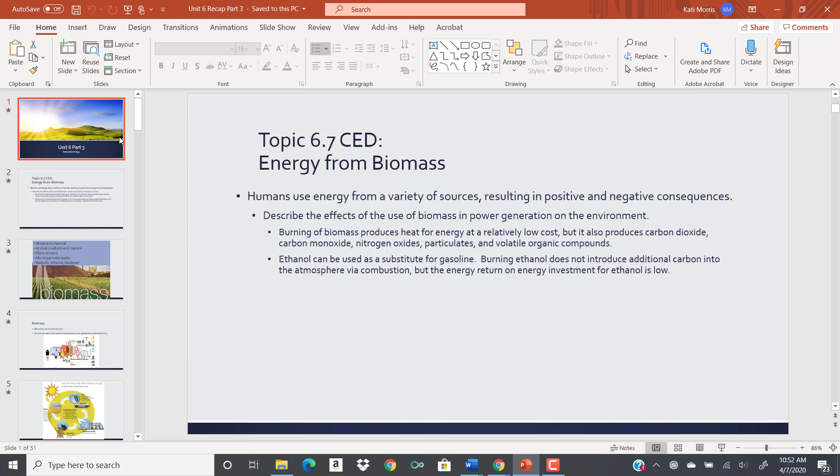Also, keep in mind the same stuff that we talked about with non-renewable energy sources, which is look for the areas of pollution, especially in the processes that come before and after it does whatever it does.

The one thing that you also have to look at with renewable energy that you don't have to look at with non-renewable energy is how much energy can you get out of this and at what times of day is it available. A lot of forms of renewable energy that produce electricity are not going to be available to you 24/7. So the question becomes, what do you do when it's not available?

And the answer is honestly pretty simple, and it's twofold. The first one is you design ways to store that electrical energy, and that would be in battery technology.

Before we had all of our shutdowns, I do know that people like Elon Musk were working on ways to store energy in large batteries. I want to say that he had created one for a home, which if you used it with something like solar paneled shingles on your home, you would have a system where you could store up a lot of energy during the day and then be able to use it during night.

So that's one of the two solutions to the question of, well, this isn't available all the time. The second answer to this question is that you create an energy grid.

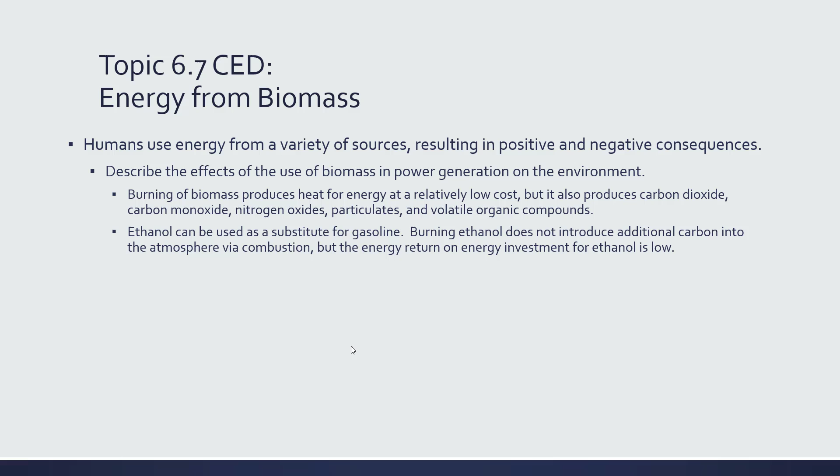All right, so we're going to talk about biomass first. Remember, again, biomass is stuff like wood and charcoal largely, but it's anything that you get from plant growth. So that also includes animal dung. It includes things like paper.

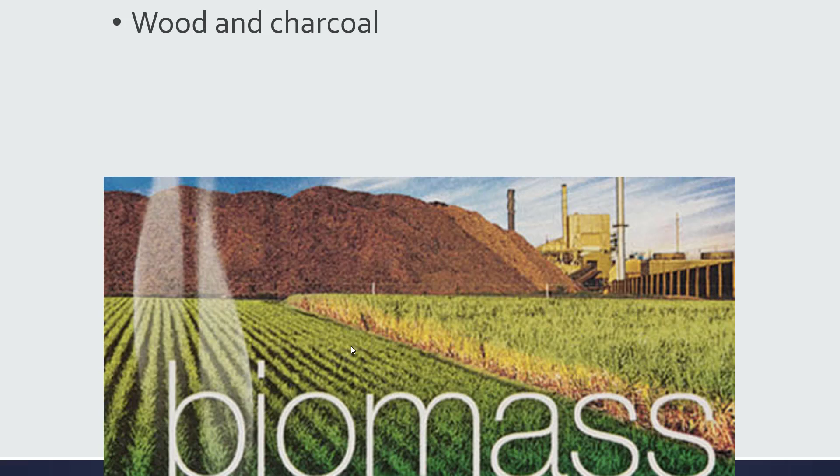Any of that's crop residue, and by crop residue I mean the parts of the plant that you don't want after you harvest the stuff that you want. All right, so, oh good, I did actually write all of this. And again, garbage falls into this as well.

Municipal solid waste, because this is not on the test, let me define that for you. Municipal means for a city, solid, and then waste. So solid waste is garbage. So municipal solid waste basically means your city's or your town's garbage.

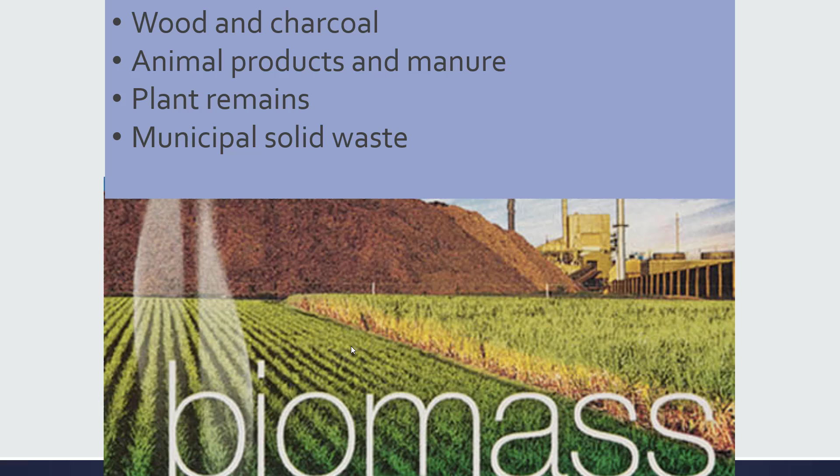And then also this includes biofuels, which obviously you don't get directly from the ground, but you can create those from fermentation.

Biomass, again, is most often used first in developing countries, and secondly, straight up for heat and light. You burn it, you get what you need from it right there. But you can use it the same way that you use coal and the atom. You burn it to boil water, to create the steam, to turn the turbine, to turn the generator, to create the electricity.

Now again, we are not going to get to solid waste for the national exam, but let me go ahead and briefly talk about it, because I did talk about this when we talked about soil. Landfills, sanitary landfills in the United States are built so that they have a clay liner and a plastic liner.

You take your garbage, you put a layer in, you pack it down as tight as you can, put some dirt, layer, pack it down, dirt, and then when it's full, you cap it with another layer of clay and then soil and then grass or some other greenery.

So basically, in developed countries and in the United States, our garbage is packed so tightly that very little decomposition takes place. And when we talk after the national exam about garbage, I will talk about that then.

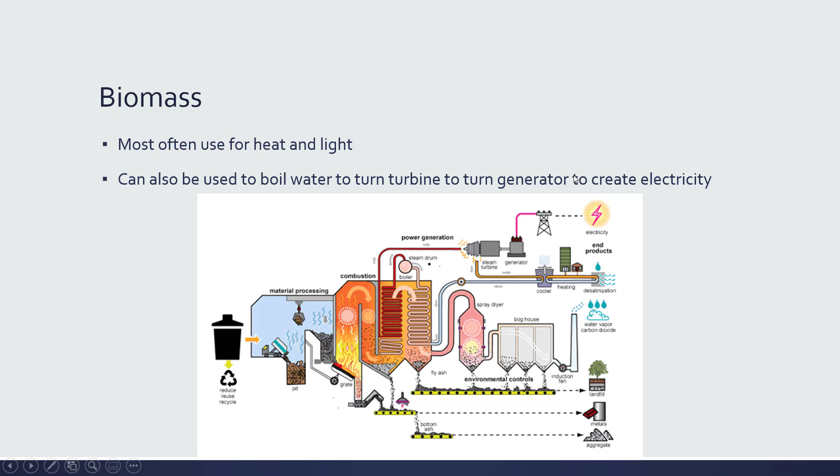Now, what you don't have here is any of the mining that happens elsewhere. That doesn't mean there's no pollution in the formation of the garbage, because think about all the things that go into it and the processes that create that. But considering humans are creating that in the first place instead of taking it to a landfill where it does nothing, here it's serving a purpose. So look at the rest of the process - this looks exactly like what you see in coal-fired power plants. This is where biomass is being used in a waste-to-energy plant to create electricity.

If you grow biomass specifically to make biofuels, the argument can be made that this is close to a carbon neutral creation, because plants take in carbon dioxide. You're creating the biofuel, which is then burned by cars, emitting carbon dioxide, which is then absorbed by the plant. Of course, they're leaving some stuff out - these processes create carbon dioxide, and this also creates carbon monoxide. So this is not a completely closed system, but they do have a point here.

Your carbon footprint overall is going to be lower than it is with coal, because coal is a carbon sink. It was never intended to really enter back into the carbon cycle to start with. Every single day there are things that die that end up being pulled into the earth, going through that anaerobic process that creates more coal. So we are not taking away from that basic carbon savings. While this isn't perfect, it's definitely better than mining coal.

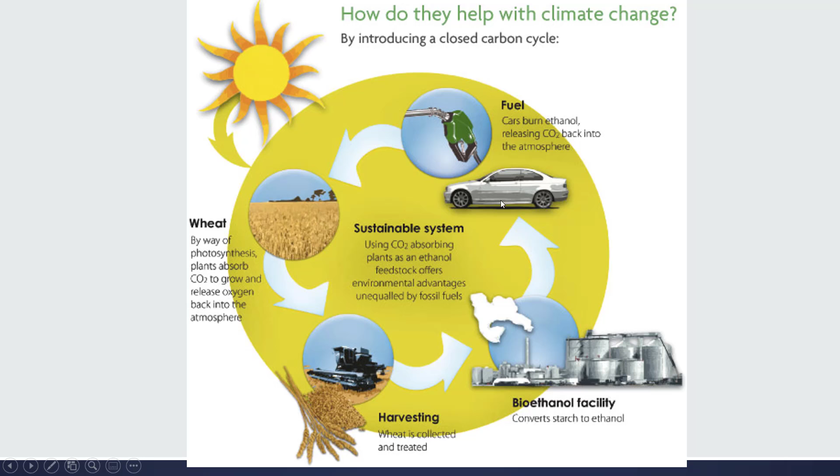Now again, notice there's still a problem here. You have a loss of biodiversity because this is a monoculture, and you're also destroying habitat by creating these fields. But again, you have those offsets. Also realize most cars right now in the United States are not built to burn strictly biofuels, so that is another barrier here in the United States to doing this.

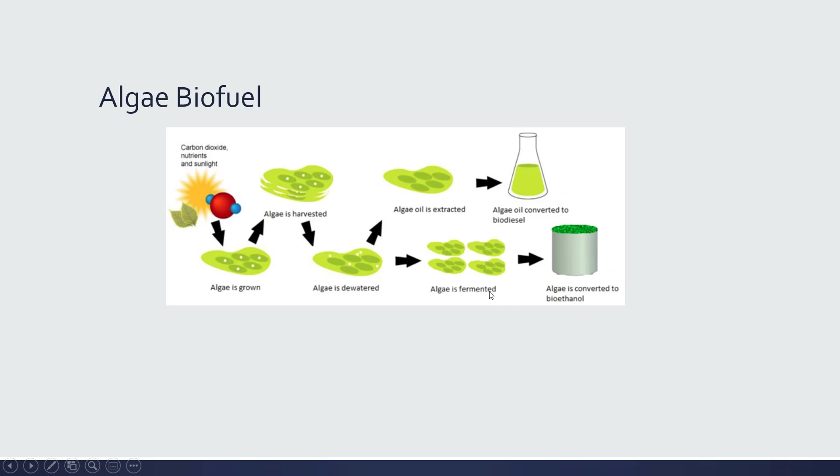Now, this is also really cool. There is a company called Algenol in Lee County that is actually doing this. There is algae that creates an oil that can be used as biodiesel, and then you can take the algae itself and ferment it to create bioethanol. So if that is something that is fascinating to you, you can make an entire career out of growing algae to make biofuels. Please also realize you can use corn, sugar cane, and something called switchgrass to create ethanol, which is another specific biofuel.

If that word ethanol sounds familiar, that is the alcohol part of alcohol that makes it drinking alcohol. The reason I have switchgrass on here is that this is a kind of grass that grows incredibly quickly, meaning you can harvest it multiple times a year and use that biomass. It not only grows quickly, but it grows densely, so you get a lot of biomass per unit area when you're growing it. Take a look at how this process works. Currently, we use ethanol in the United States - I believe up to 10% - to make the gas supply stretch further. So if you have a gallon of gas, you will add 10% of a gallon of ethanol to it.

That's how much ethanol our engines can handle before they start not working so well. Brazil is a country that currently has ethanol-only powered cars. So why don't we do that?

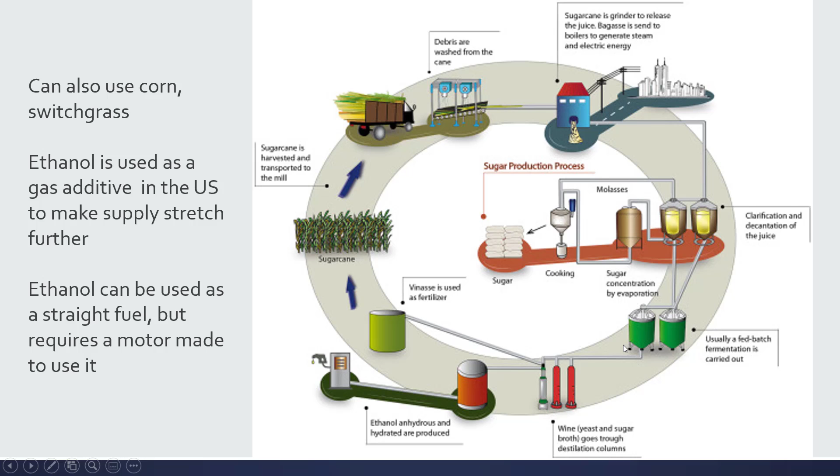Also, please understand, how do you get that ethanol? It's fermentation. Fermentation is an anaerobic process. All right, solar power.

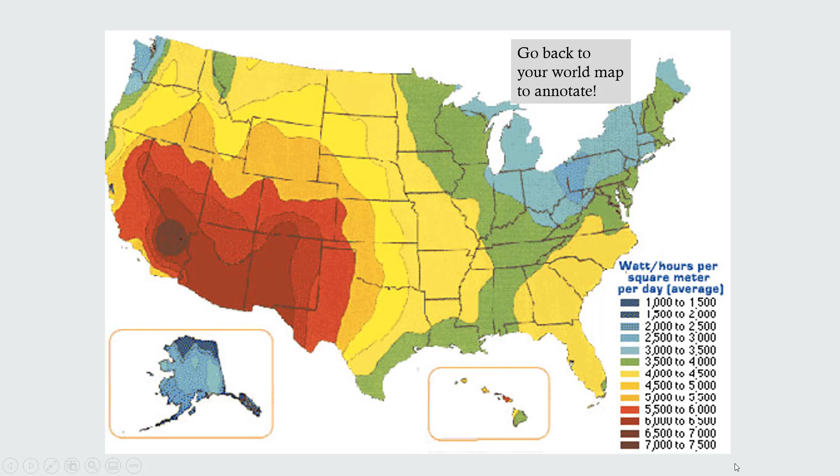Where is solar power a good idea to use? This right here kind of tells you where it would be a good idea to use it. Okay, so there are many ways that you can use solar power.

One is called passive solar heating. You can literally use the sun to cook your food. Now imagine how revolutionary this would be in countries where they use biomass in order to cook things. Now, this is a slow process, it takes all day. But here in the United States we have crock pots, same idea, slow and long. Imagine what it would be like on a sunny day to go ahead and set up your pot and not have to go collect firewood to cook your meal at the end of the day.

Now, is this perfect? No, this requires foresight. If you have a sudden shower or whatnot, it's not going to work for you anymore. But the pros are, on the days that you know it's going to be sunny, you don't have to go get firewood, or the firewood that you do use will be stored against the days that maybe you are too ill or too tired to go get it.

We can use passive solar heating here in the United States to help heat our homes. Here in Florida that's not a concern, but think about up north. Dark roofs, you paint your roof dark in northern areas, it helps to heat your home. It's one of the reasons why here in Florida it's a really good idea to have a light roof, because it will literally cut down on your air conditioning, because you're reflecting the sun. Light roofs and reflective things like this have what's called a high albedo. They don't absorb the sun.

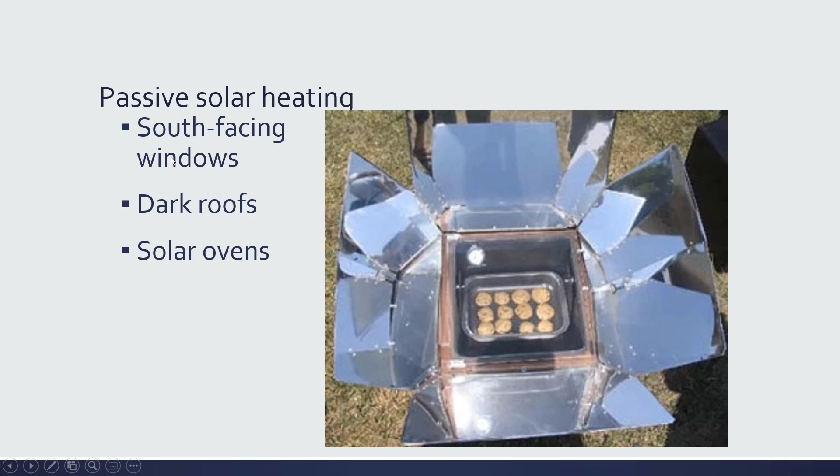South-facing windows actually work for cooling as well as heating. When windows face south in the United States, it gathers all of the sun in the wintertime, because in the wintertime the sun is low in the sky. In the summertime, the sun spends a lot of time up high in the sky, meaning you don't get as much of that direct sunlight, so you don't have to combat that to cool your house.

Now, why don't we do this here in the United States? Because pretty much everywhere, people like their houses to face the street. In order for this to work, you would have to be comfortable with the majority of the windows of your house facing whichever way the south is.

So also, how does this work? Let me explain these two things here: heat absorbing surface. This will only work if you've actually got a surface to absorb it. So instead of carpet, you would need dark colored tile as an example that would absorb this during the day and release it at night. Or if you had pipes of water circulating through, they could then help to circulate that through the house.

And then thermal mass. Your walls and floors need to be built extra thick so that they, like a thermos, keep the hot things hot and the cold things cold. So when you have all this heat coming in, if your house is super insulated, it means that you are keeping that heat in your house. And then it also means that if it's cool in the morning, it will remain cool and keep the heat outside. Basically, it's just a barrier to heat flow. That's all it is.

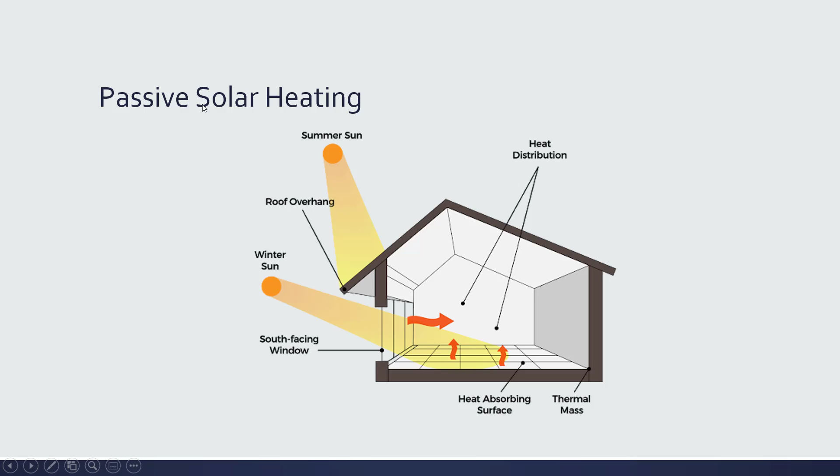Okay, then you have something called active solar heating. Notice that with both passive solar heating and active solar heating, we are not talking about electricity. Active solar heating is more of what I was referring to with the pipes going through this. Passive solar heating is strictly the structure of your house giving you what you need. Active solar heating means you've got a series of pumps

Here in Florida, people use this system to heat their pool rather than using electricity. Why not? Because you're using less energy for the pump than you would be using electricity to heat a coil to then heat the water in your pool. So what people will do, let's say this is a pool, they will pull some of the water up, heat it, and then pump it back down into their pool to heat it up.

So again, we're still not talking about electricity. Passive solar heating is just the structure of the house and the way it faces. Active solar heating is where you use a pump and a system of pipes with water in it to either heat your house or heat the water you use for your shower or heat your pool.

You can also use the sun's energy in an indirect fashion. Here's what you do: you have a tower that has a receiver in it that has a liquid that boils at a lower temperature, like alcohol boils at a lower temperature than water.

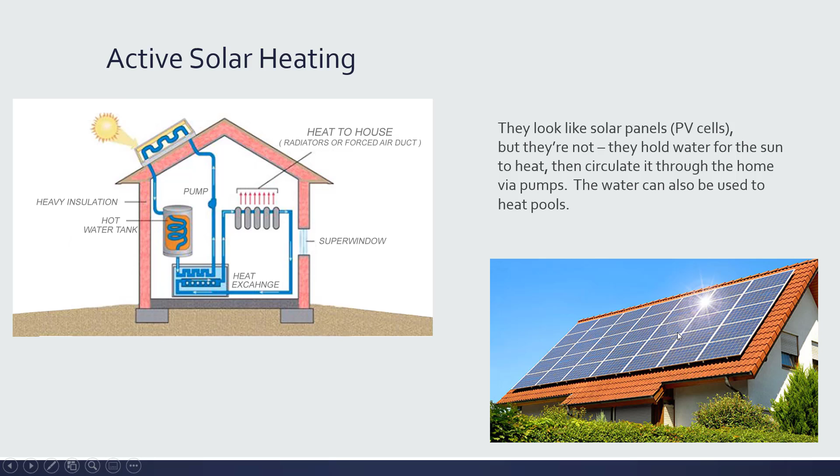Alright, so let me go over the pros and cons. The pros are, again, you're using the sun rather than other sources to make electricity happen. The cons are you have the initial startup cost, and if you're in a place that's not very sunny, this doesn't work for you.

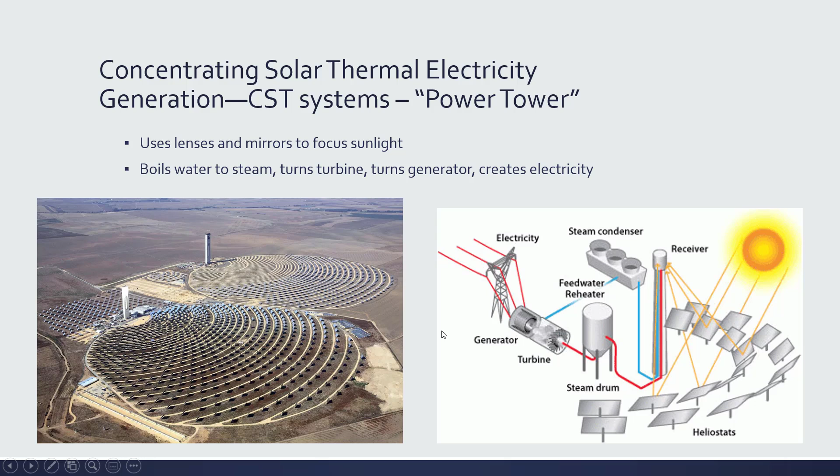Now, in terms of habitat destruction, it's not as much as a coal plant. You've also got the rows in between here, and things can and do learn to live there. Creation of new jobs is another pro. Any of these create new jobs, because not only do you have to build this, you then have to maintain it, and you have to jack this into the system that you already have. There's lots of opportunities to be employed with something like this.

All right, now this is what people think about with solar panels, with solar power: panels that create electricity. This is the sun creating electricity directly. There's no turbine, there's no generator. So how does this work?

The photovoltaic cells are built with an N-type layer and a P-type layer. They're semiconductors, which means that they are made of metalloids, like silicon.

So how does this work? The N-type layer is the negative terminal, the P-type layer is the positive terminal. The energy from the sun knocks electrons from one layer to the other, creating the electron flow that creates the electricity.

This process, I'm not sure whether you need to understand it in more depth than that. It'll just be one of the things we'll put onto our cheat sheet, so it's there for you.

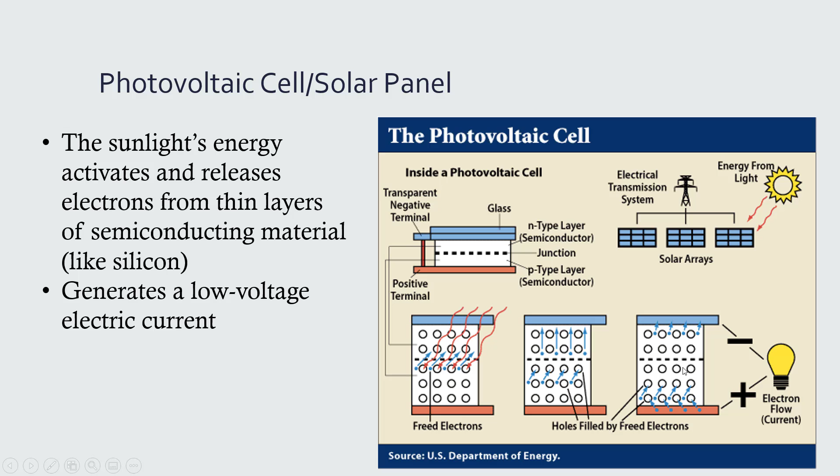Now, the pros: no emissions, no moving parts, it just does its thing. It can produce electricity during peak demand—imagine one of the sunniest days, those are also the days you need the most air conditioning, here in Florida for example. It's economically feasible; once you pay it back, which doesn't take very long in the scheme of things, it's pretty much free. It can be used on a small scale. People here in Florida who have these on their roofs generally make more electricity than they can use in a single day, and they literally sell the excess electricity back to the power company.

Also, imagine how this would work in developing countries. You could have single huts with these on top of their homes, and use that electricity to cook instead of using power plants. What if you're a diabetic in the middle of a developing country? Now you have a solar panel that could be used in part to power a refrigerator to keep your insulin cold, or to keep vaccines or medications cold. You can use it in part to keep your food from spoiling.

If you combine that solar panel with a battery, you could theoretically use it 24/7. I don't know if you've seen the parking passes given at the beach, which really only need power during the day—they're largely powered by solar panels now. So it means you can take something that requires electricity and place it down in the middle of nowhere. Solar panels—I have a portable one I take with me when I go on hikes, because it means I always have a source of energy for my phone. It can be used for kids to charge a battery, so then a battery-powered lantern lets them do their homework at night. It can be used to power laptops in places where you can put Wi-Fi up but can't put up a power plant. Solar panels to me can be very liberating—they provide energy on the smallest of scales.

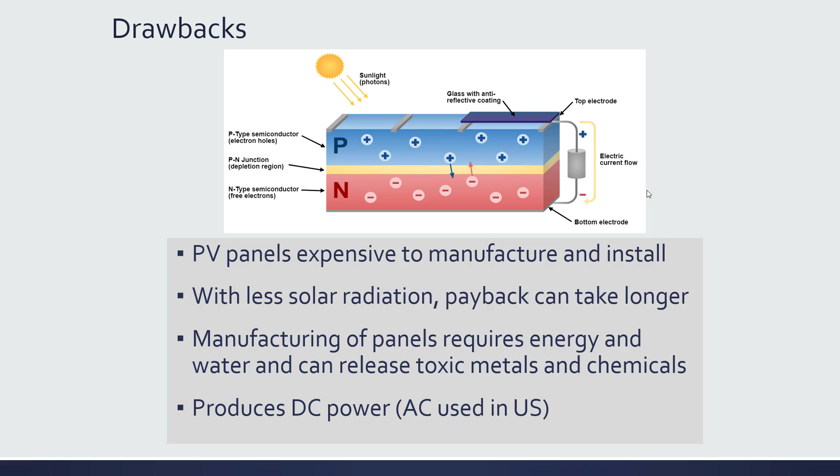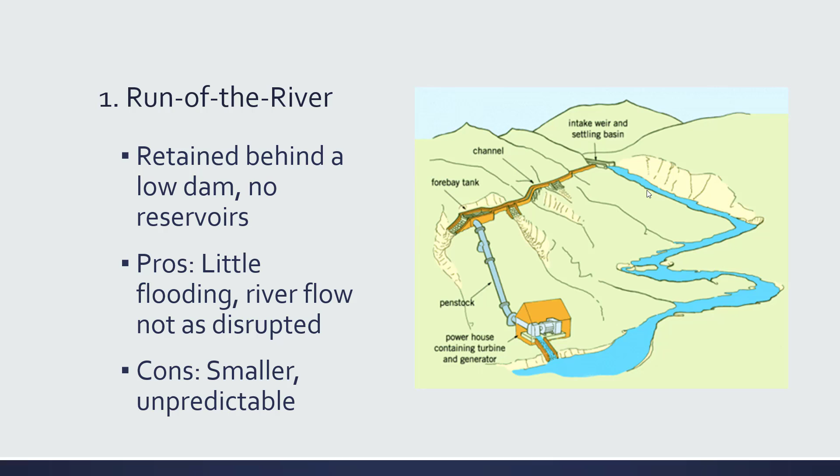First of all, you have run of river—a very low dam, no reservoir. The pros: little flooding, the river flow is not as disruptive. The cons are it's smaller and unpredictable. So this is a perfect solution for, say, a ranch in the middle of nowhere, or agricultural systems—this electricity can be used to power drip irrigation. This is very good for smaller applications. But if you have a lot of smaller places along a river, maybe this is a better idea than damming up the whole thing with one dam, because look at what this is not doing: it's not blocking the flow of the water, not only for environmental purposes but also for the people who live downstream—they can still depend upon that water.

Side note, as a reminder: the amount of water in a river really depends upon the season. There are different seasons where you have more water present than others, because it depends upon rainfall and snowpacks melting and stuff like that.

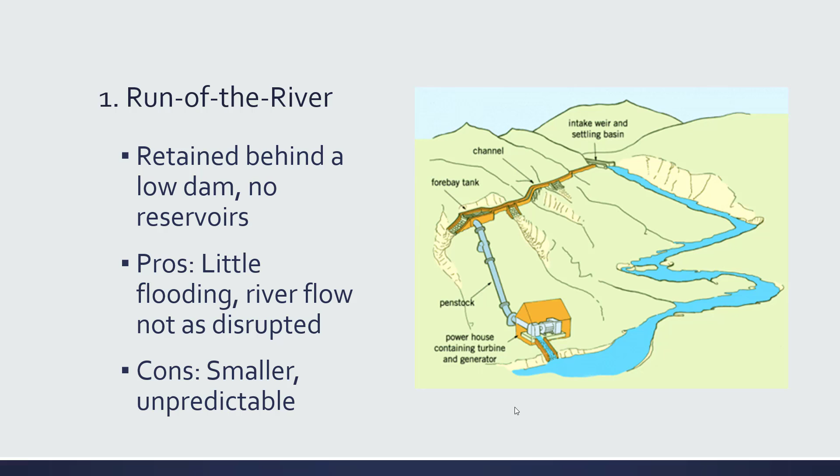Okay, so water impoundment—these are the big boys. The one with the largest reservoir in the world is in Washington. The largest dam in the world is the Three Gorges Dam, which blocks off the Yangtze River in China. Back in the day when we had multiple choice, that would have been one for you to know. It's just something to keep in mind.

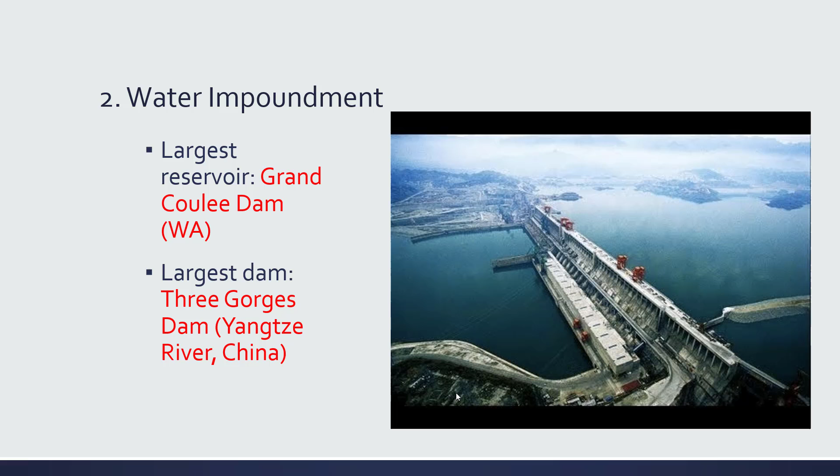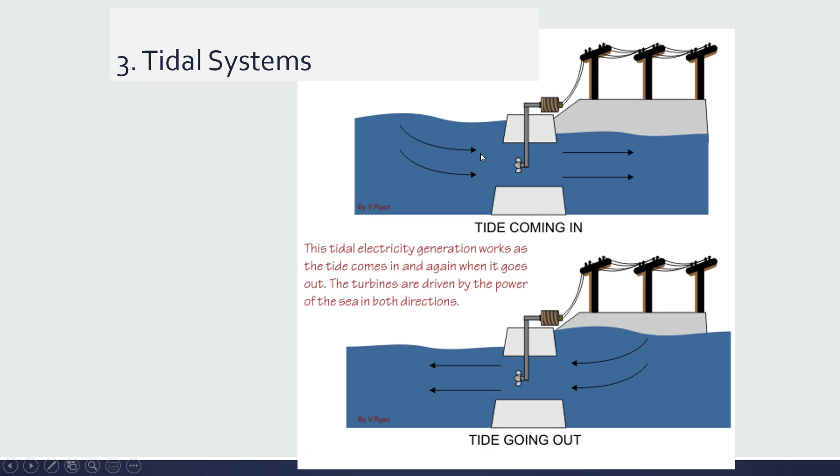Okay, so then you also have tidal systems—we'll get to pros and cons again here in just a second. You've got a turbine that moves both ways, so you can take advantage of the tide coming in and the tide going out. These are efficient, but tidal differences are not super great. The con of using tidal power is that there aren't a lot of places where the tide is strong enough to actually be worth building, but that doesn't mean they're not a solution in some places.

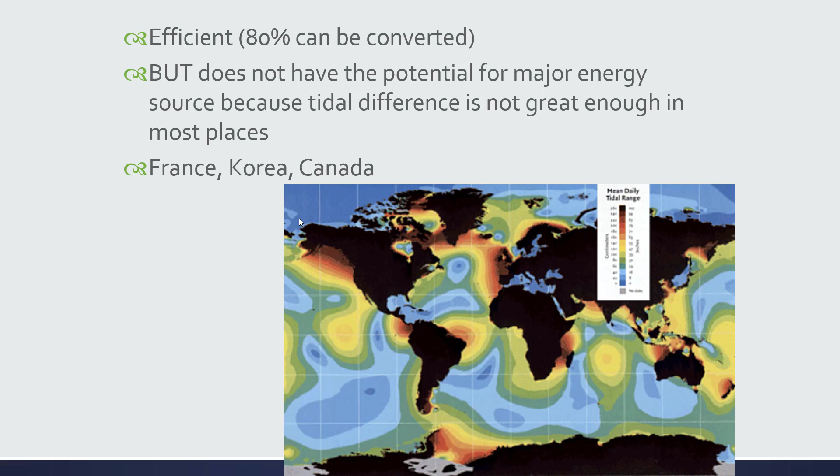If you can't tell, renewable energy is about, kind of like integrated pest management with farming, finding the best solution for where you are. There's no one size fits all for this stuff.

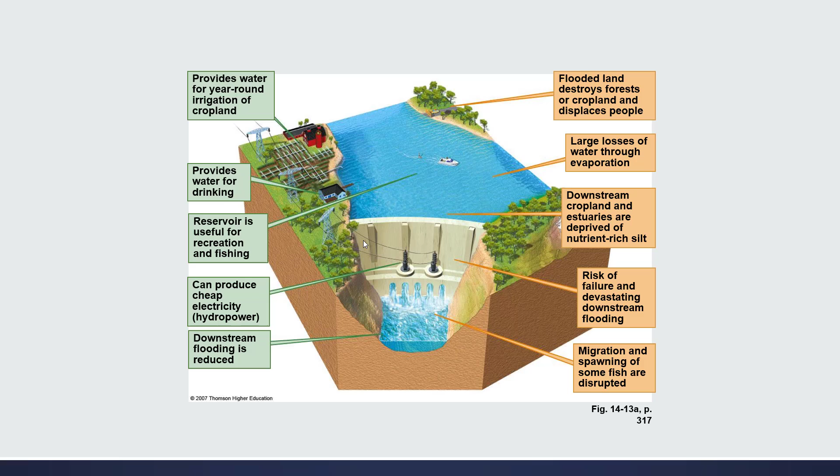So let's revisit dams again, pros and cons. Definitely take a look at all of this. Realize whenever you talk about recreation and fishing, you also have an opportunity for employment, and the building and maintenance of the dam is also an opportunity for employment. So pause at this slide and make sure you've got all this.

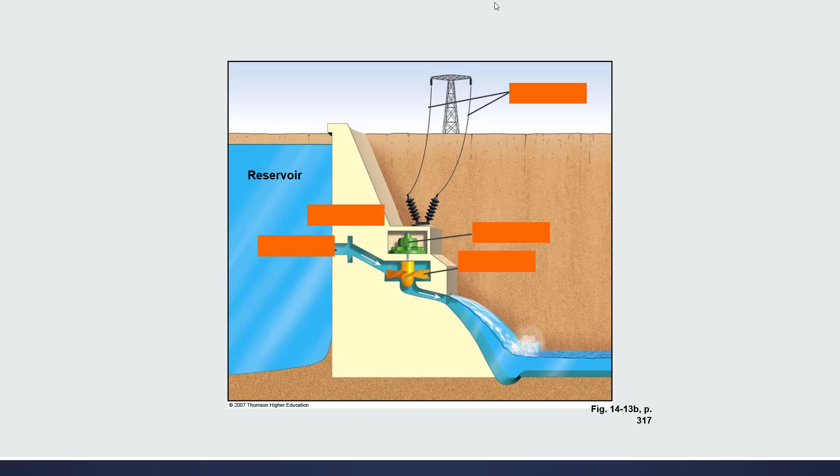But let's talk about how this actually happens. Here's how you get electricity from a traditional dam. You have a reservoir, you have the dam, which is just a wall. Water goes in through a reduced intake, and just like putting your finger over a running hose outside to make the water squirt faster and farther, when a large source of water narrows to a smaller intake, you speed it up. That turns the turbine. The powerhouse is the generator that creates the electricity.

So notice what's missing: the burning of stuff to boil water. While this water is warmer when it comes out than over here, just through mechanical agitation, you do not have thermal pollution. What you also don't have here is air pollution. The only air pollution associated with a dam is in the construction of it, and any decomposition that happens of stuff that's blocked behind it.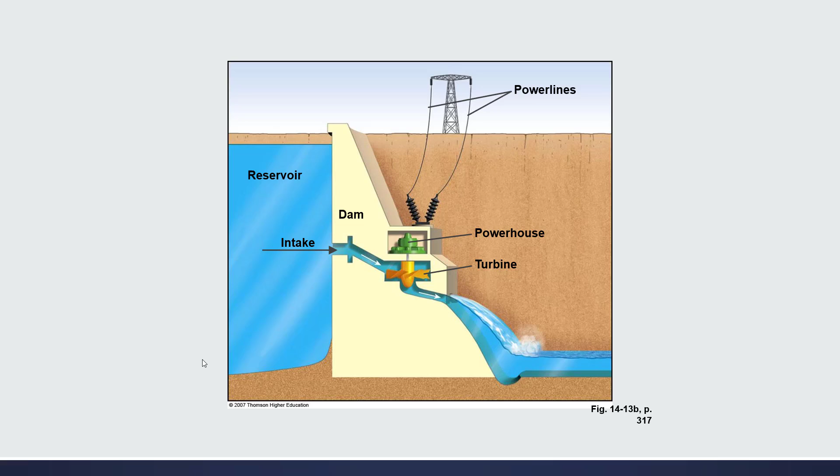Again, there is no free lunch, but it's definitely a quote-unquote cleaner source of energy than any of the fossil fuels.

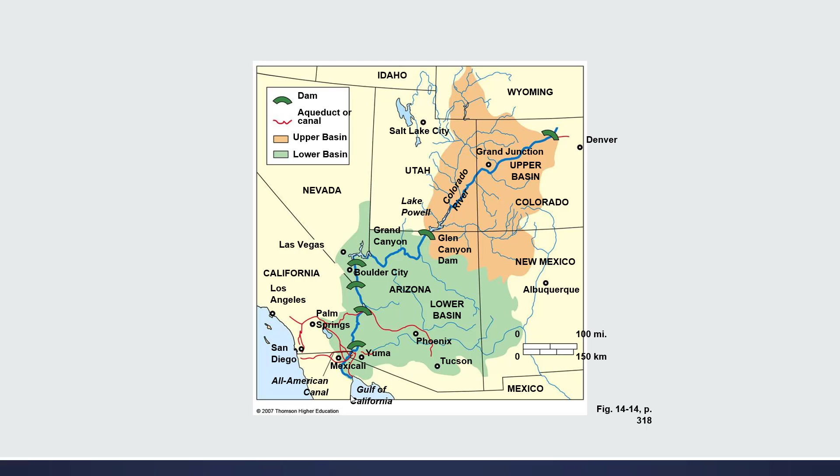Remember, when you have a series of these big dams, eventually you don't have a whole lot of water ending up at the very end, which is bad from an environmental perspective, because at the mouth of every river is where you have an estuary. Go back and look at how important those are. It also means the people downstream are like, where's my water, bro? They don't have it for residential uses, industrial uses, or agricultural uses. So again, pros and cons as far as the eye can see.

And we had already talked about fish ladders, so you know how to mitigate problems with fish migration.

Here is the deal with the Three Gorges Dam. It is 2 kilometers long, and as a reminder, let me give you a conversion factor: 1 kilometer is 0.621 miles, so 2 kilometers is about 1.25 miles. So if you can walk 1 mile in 15 minutes, that means walking 17 or 18 minutes is how long that dam is.

So the pros are how much power this thing puts out and the kind of air pollution it's replacing. The cons are it displaced a lot of people, because you have flooding that now occurs back here, so all of the land folks used to live on near the river is gone.

This is also a small problem right here: the dam's built over a seismic fault. Remember, a seismic fault is where two tectonic plates are moving against each other. So, what might happen if that breaks? All that water gets released all at once.

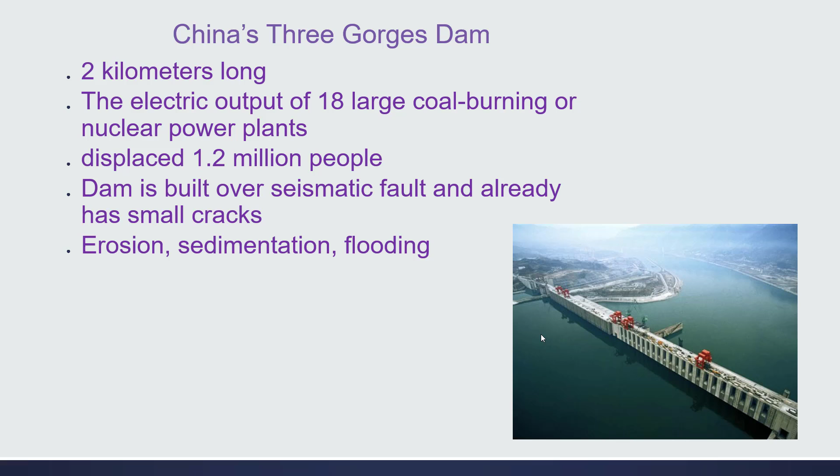A lot of dams are being removed as we move to other renewable energy sources. Obviously, it's better for the environment if they're not built in the first place, because everything serves a purpose, or it wouldn't be there in the first place. Evolution would have gotten rid of it if it no longer served a purpose.

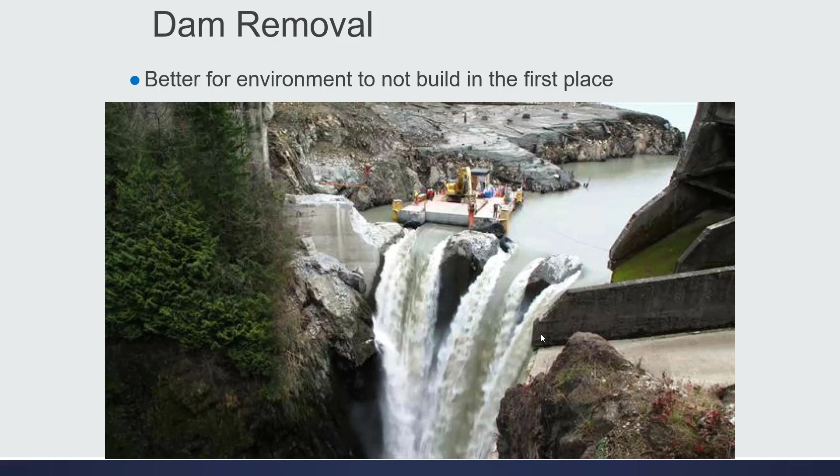Yes, when you remove a dam, people freak out because of the flooding that happens, and the river changes its course, and it's like, that's what it's supposed to do. It definitely makes the environment more stable, because all of the systems that were set up in place, from riparian zones to the food web of biodiversity in that area, become stable, because all of the things they were built around come back when the water is allowed to flow where it's supposed to be.

Alright, so again, benefit of dam removal.

If you're wondering why salmon looks like this, it's just a useless fact here - salmon's entire jaw structure changes as they make that migration back to their hatching grounds to lay their eggs and deposit their sperm and die. If you think that's fascinating, I encourage you to pursue that via YouTube.

And then again, the potential issues of dam removal. Take a minute to read all of this.

On the national exam, I am betting that you're going to get a make a claim and justify question. There is no wrong side to how you land on these things.

Should we take all dams down? I don't know. There are two ways to go about this. No, leave them in place, because you have, again, that legacy sediment.

You have all of the new biodiversity that has arisen based on the new way that the river is. Human structures, and we depend upon this type of energy that does not create air pollution.

However, again, ecological systems are built to be the way that they are. Evolution takes care of that. There is no way of knowing how much stress we are putting on other systems in other places because we don't have rivers flowing the way that they should.

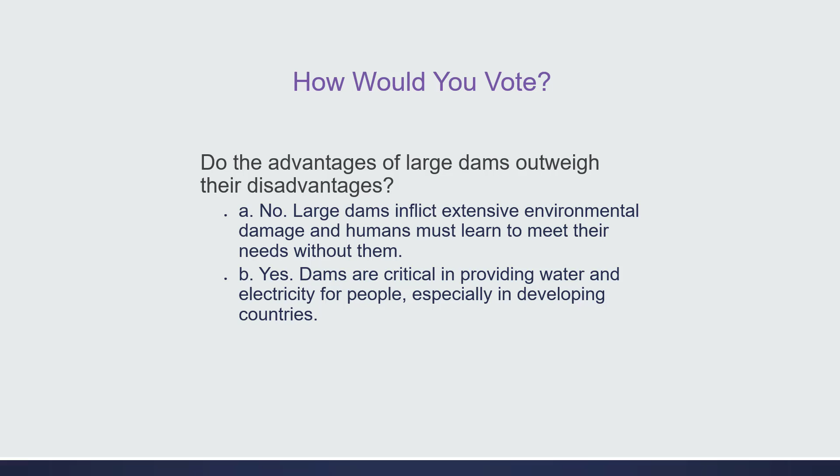So, pros and cons. And you should be able to support your claim on actual evidence and not on feeling.

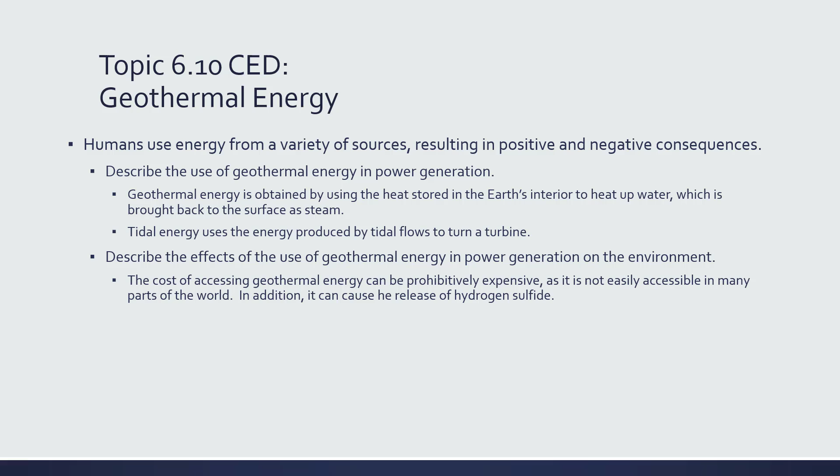Okay, geothermal energy, make sure you read this. There are a lot of different ways we can use geothermal energy, so we're going to talk about how you do it to create electricity. There are two ways that you can do this.

The first one is you have a pocket of magma really close to the surface, so you pump water down and the magma boils the water that creates the steam that turns the turbine, that turns the generator, that creates the electricity. Or there are naturally occurring pockets of steam that you then direct to turn the turbine, to turn the generator, to create the electricity.

You still need other sources of water in place, and this is true of any time that you are turning a turbine or turning a generator. That mechanical force creates its own heat through friction. You got to cool that down so it doesn't overheat and stop working.

Great, go, have fun. So beyond the habitat destruction and the loss of biodiversity and the fossil fuels that are used to build these plants, this is a largely pollution-free way of creating electricity.

Now, of course, there are cons. And the cons are, unless you have that bubble of magma that's really close to the surface, you can't do this. In the same way that with hydroelectricity, you can't use a river if you don't have one, you can't use these bubbles of magma unless you have them as well.

Now, realize there is a different way to think about geothermal energy, and that is simply the earth. So please realize that these are different. When you're talking about using geothermal energy to create electricity, you're specifically talking about these steam pockets or these magma pockets. When you're talking about heating or cooling a home, you're just talking about the ground.

The ground stays at a constant temperature all year. So if it is wintertime and it is really, really cold and the earth is warmer, if you pump the air in your home through the ground, it then reaches that ambient temperature and you can then pump it back into your house and it'll be warmer.

Then if your house is too hot, like say here in Florida, you can pump your air through the ground and cool it. If you've ever been to the beach and you're hot, hot, hot as you walk your way down to the water, you also know that if you brush away the surface sand, it doesn't take very far for you to get to that nice cool earth.

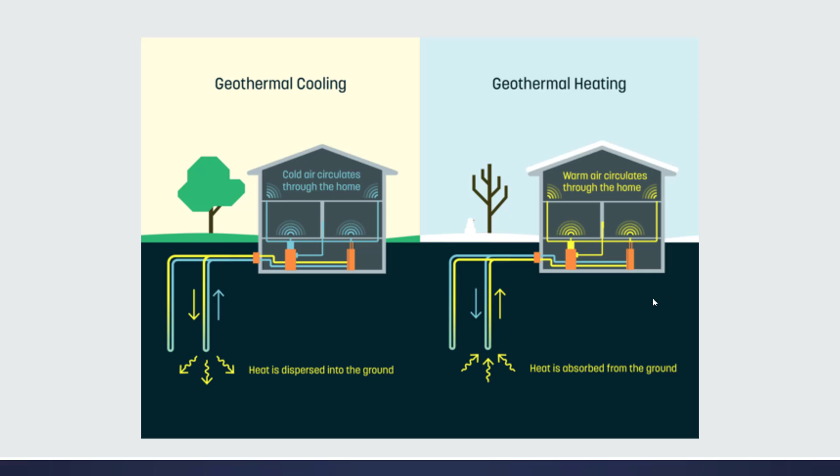FGCU, Florida Gulf Coast University, actually uses this principle to take the water that they use in their water fountains and they pump it down into underground tanks at night, and they chill it just by using the ambient temperature of the ground, and then they pump it back up during the day. So they use no electricity to actually chill that stuff. Pretty cool.

Also realize, as a side note, you can use steam straight up to just heat your house, but you have to be close enough to it to work. Hot steam doesn't go very far, so it's not like you could have a source of it 5 miles away. If anybody has ever had a hot cup of coffee, you know that doesn't last very long.

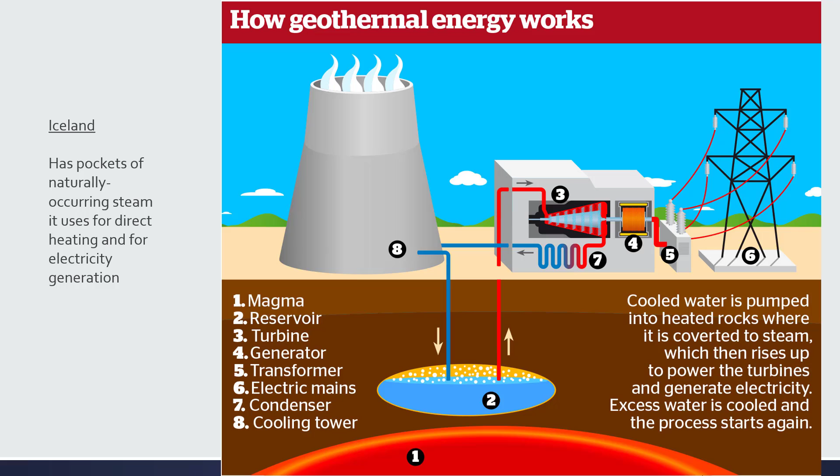Okay, so hydrogen fuel cells. These are largely designed as an alternative to internal combustion engines for cars. It operates like a battery, but the reactants are added to it continuously. So you have oxygen in the air, and then you have a source of hydrogen. Those two things, when they are together, will naturally combine to create water vapor, but in the act of that combination, it also creates energy.

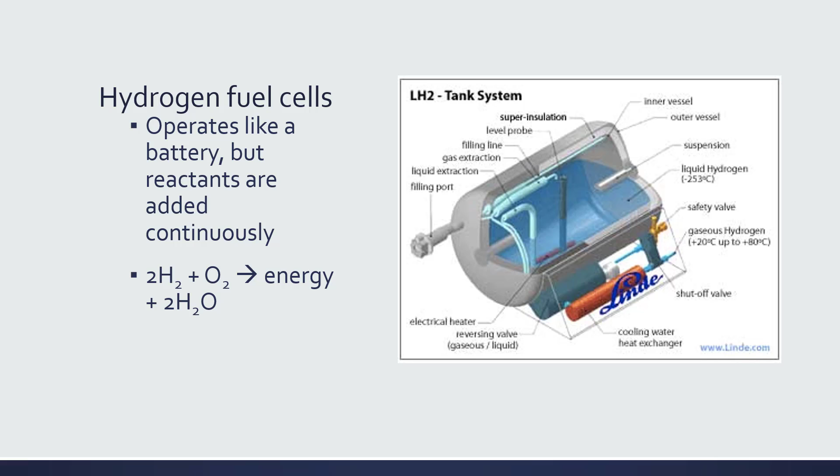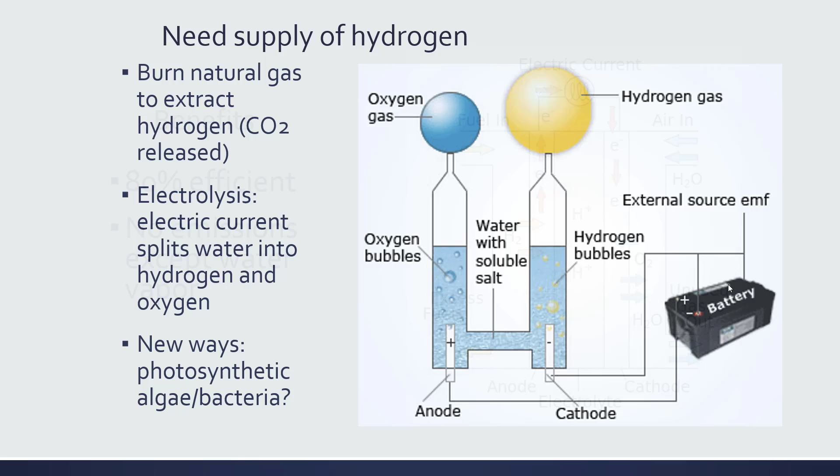However, you need a supply of hydrogen. You can burn natural gas to extract hydrogen. You can also use a process called electrolysis to split water to create that hydrogen. You can actually do this at home with a 9-volt battery, a couple pieces of copper wiring, and 2 pencils. It's possible that we could engineer algae and bacteria to create that hydrogen gas. Please realize that when we talk about burning and electrolysis, you have to put in energy to get that hydrogen gas. So the benefit is the only byproduct you're creating is water vapor.

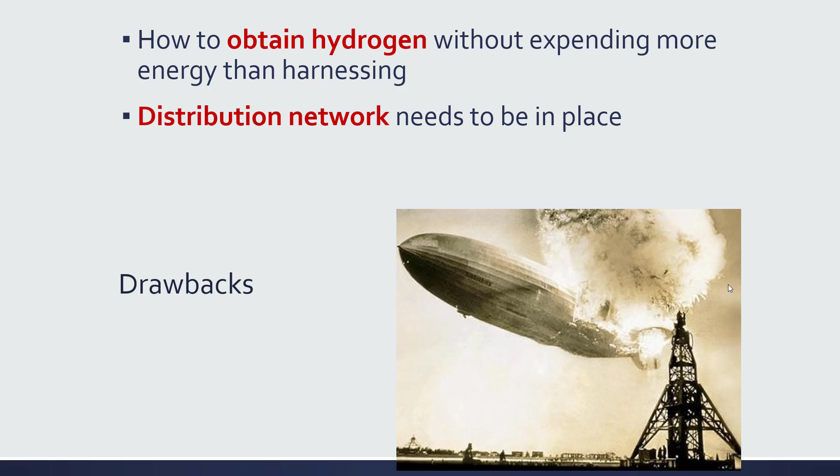Here are the drawbacks. How do you obtain that hydrogen without expending more energy than you're harnessing? When you talk about EROEI, are you ending up in the hole doing this? Is this just kind of like a fun experiment that's not worth it? There's no distribution network. And if you're transporting hydrogen, hydrogen is ridiculously flammable. If you're wondering what this is, this is the Hindenburg. Back when we were thinking about using blimps to transport people, we used to fill them with hydrogen, and it got all exploding and stuff.

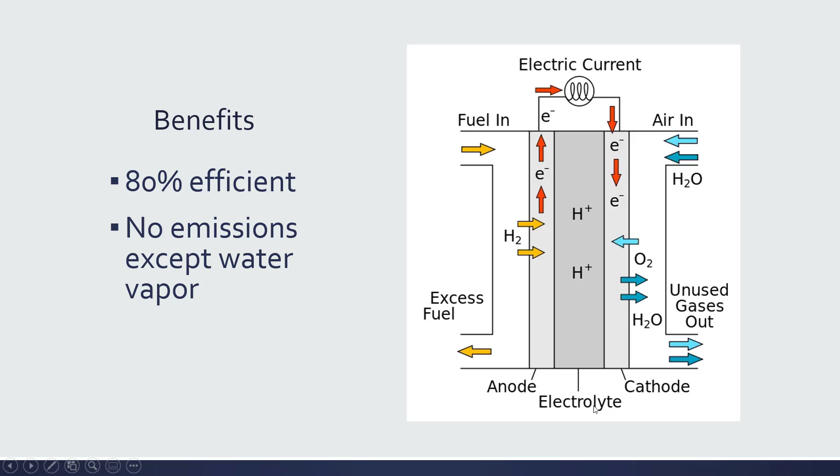Okay, by the way, how exactly does this car move forward? The process of making that energy I'm talking about is specifically electrical energy. So these are electric cars.

Okay, wind energy. Wind just keeps flowing. Wind energy used to be used with windmills to turn a stone that would be used to grind grain. That was its large purpose. Now we found out that you can use wind to turn a turbine, to turn a generator to create the electricity. What are the benefits? No emissions. The wind just blows.

It's there, you may as well take advantage of it. It's free, this is the really cool part. Wind farms can share land with other uses. Like a cattle farmer can just erect a bunch of these things, since they were already farming cattle - hey, let's go ahead and have the wind turbines as well. They can be built offshore. If you've been to the beach, you know there's wind there all the time. Another really cool part is they can be small scale. So let's say you have a farmer in a third world country where the wind is always blowing - they can use that wind turbine as a pump to pull water out of a well to water their plants. You can then, if you combine this with a battery, use that wind energy to charge batteries to do all the same things you could with solar energy. You can have one of these on top of your house and use it as a secondary source of energy to power your house.

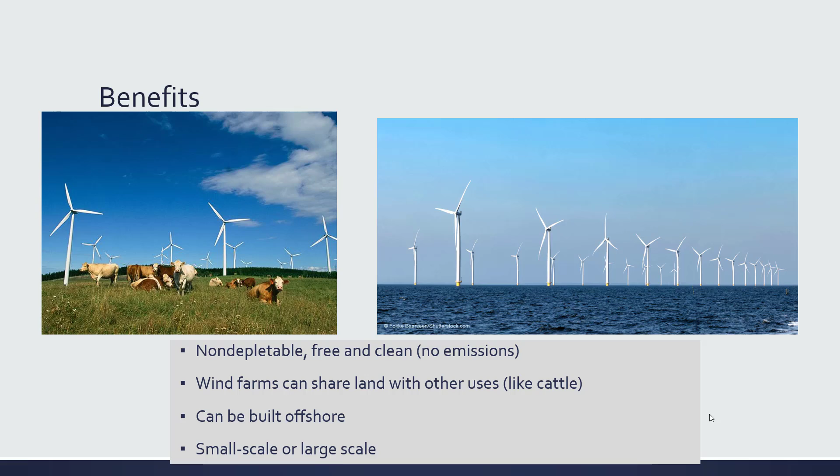Okay, the drawbacks. Batteries for storage are expensive and hard to recycle - we're still kind of working on that part. You do have bird and bat collisions. The biggest complaint with wind farms is people don't like the way that they look and that they block their view. I know that sounds like a petty complaint, but if you are out in the middle of nowhere because you wanted to look at the mountains and then you have all this visual clutter in front, you're like, come on guys, what's the deal? These things do make a whoo, whoo, whoo sound as they turn.

Do you realize the caveat here - bird and bat collisions are a drop in the bucket when you compare them to something like stray cats. Also, if you are careful to not build these things in migratory pathways for birds - there are about 5 pathways from north to south in the United States, as an example, that have been mapped for centuries - don't build a big wind farm there and you're good.

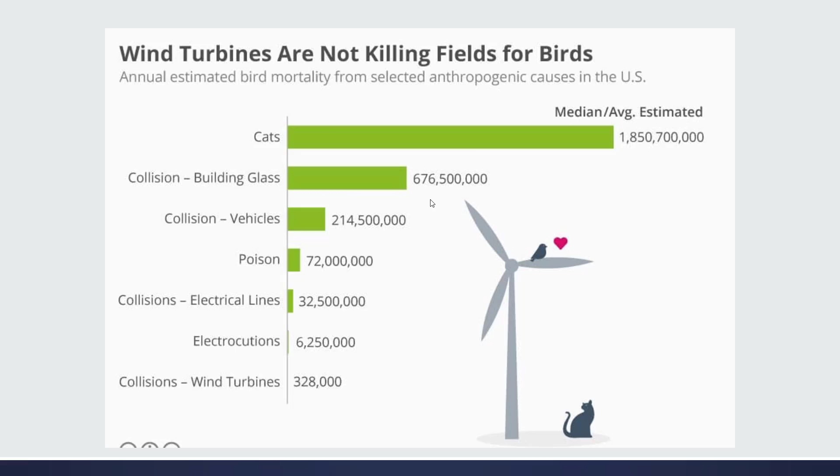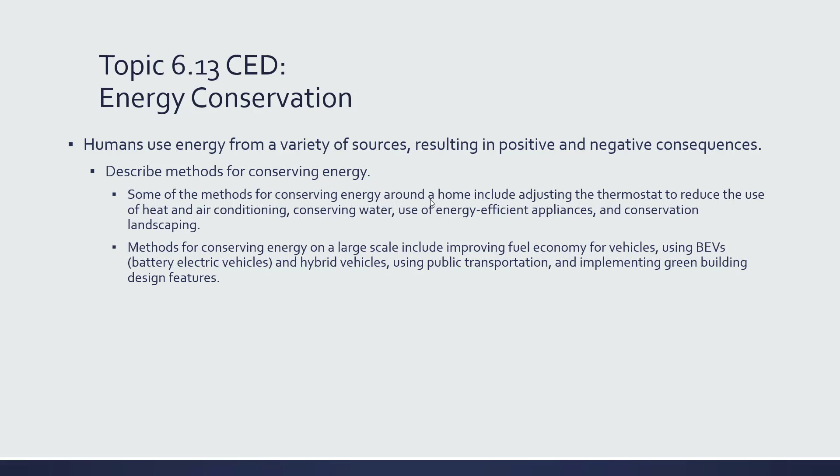Alright, so let's talk about energy conservation in general. Guys, the best way for us to stop using so many fossil fuels for energy is to stop using so much energy. How can we do that? There's a whole list of things right here. Here are some other ideas.

Have a cooling landscape. So let's say you have those south-facing windows - what do you do on the south side of your house? Plant a tree that drops its leaves in the wintertime. That means in the summer, shading your house means your house doesn't get as hot, and you don't have to use as much energy to cool it. Then in the wintertime, when you actually do need that sunlight to hit your house, poof, leaves are gone and you're good.

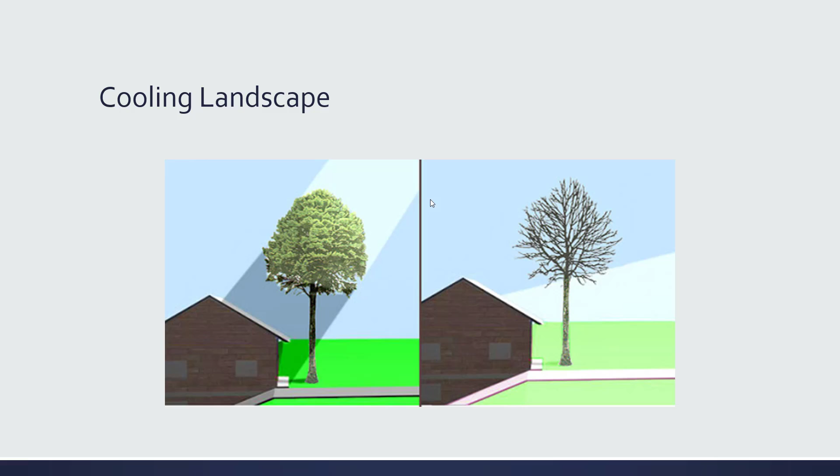Electric cars are actually more efficient than gasoline-fired cars. But remember, you have to create that electricity in the first place to charge those batteries, plus there's the mining that goes into creating the batteries. I have no idea how long those batteries are actually good for. However, if you make that electricity from renewable resources like sun and wind, you cut down significantly on your impact on the planet and your use of fossil fuels. And these things are just flat out more efficient.

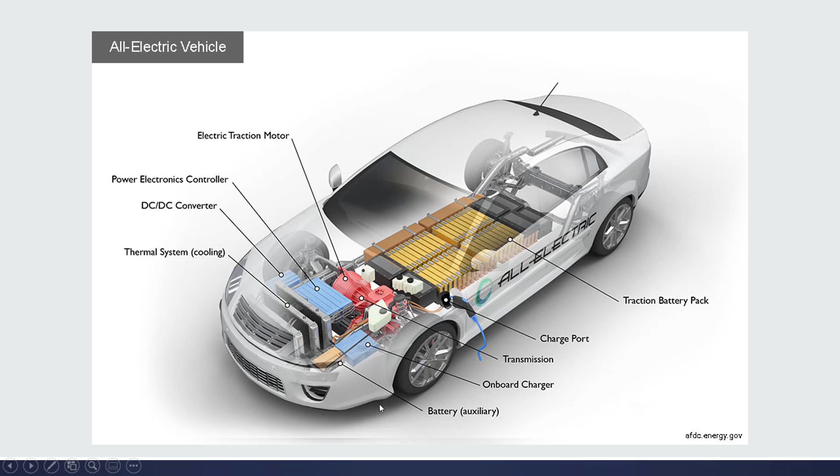Hybrids—I've got one of these. My hybrid SUV gets 42 miles to the gallon. Kind of cool. How does that work?

What a hybrid does is it has a battery, which I don't have to charge, that charges itself based on things that are already happening in your car. As your motor is running, some of that excess energy that is not used is then used to charge the battery. The battery kicks on when you don't need the power that the combustion engine can use. So when I'm driving at constant acceleration or low speeds, my internal combustion engine doesn't kick on. For accelerating and decelerating, my engine cuts on and off depending on when it's needed.

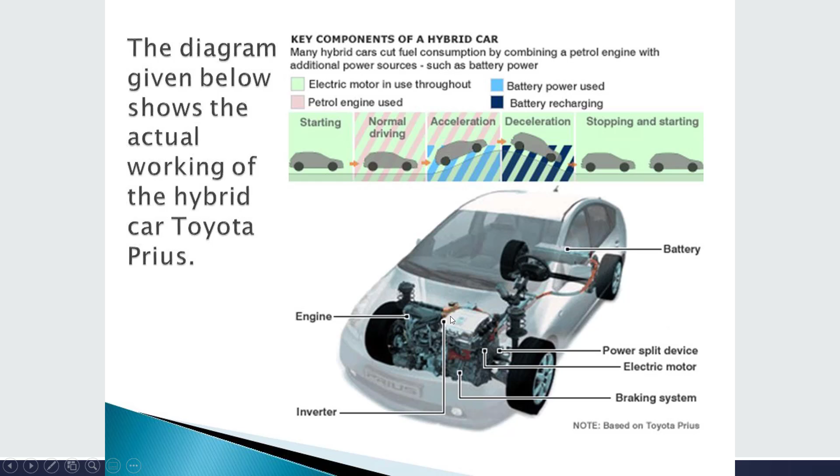So to me, this is a really great way of reducing the amount of energy that we use, because this is kind of like cogeneration in that the battery is charged by stuff my car is doing anyway.

The way that you set up your home can greatly reduce the amount of energy you use. The new house I moved into is built primarily to withstand hurricane force winds—it has strong windows, thick reinforced walls, and is single story. Everything about it is made for a hurricane. The side benefit is that the thickness of the walls and glass and the strength of these materials means it's a super insulated building, which has greatly reduced our electrical bills.

If you're wondering how low flush toilets reduce energy consumption, it takes a certain amount of energy to pump water into your house. And if you're wondering why rainwater collection reduces energy use, it takes energy to power your irrigation systems, as an example.

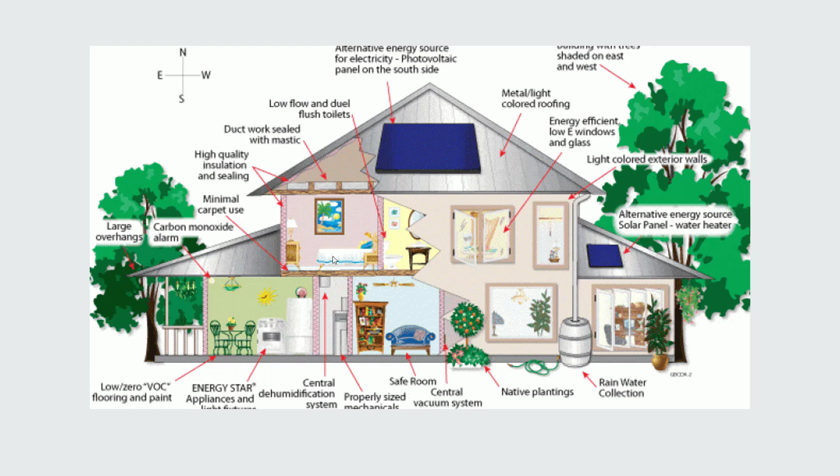So anyway, there's a lot of things here that you can look at.

Okay, so that is the end of that. And yeah, end of the review.